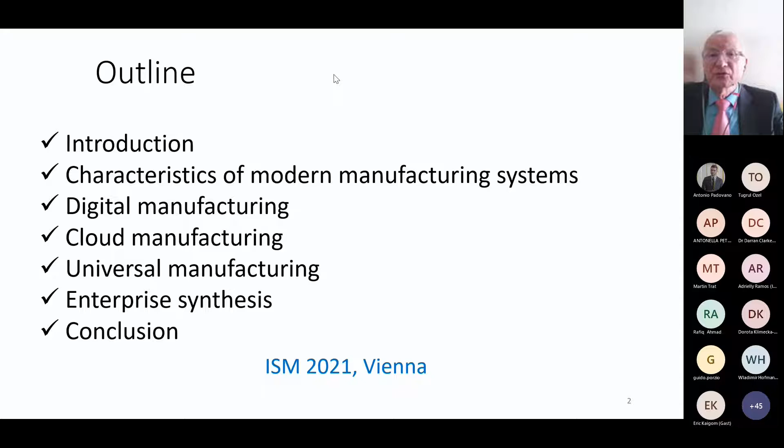I'll characterize modern manufacturing systems and talk about different types of systems, including digital and cloud manufacturing, and eventually we'll get to universal manufacturing. Okay, and basically we'll also emphasize some high-level modeling of manufacturing systems.

So this is a summary of what I see in terms of developments in manufacturing. So if this is the manufacturing universe, in this manufacturing universe we'll have open manufacturing that I'll talk about. Within open manufacturing, there is a manufacturing configuration that we call universal manufacturing, and these types of systems will make one extreme of manufacturing. The other extreme is made of integrated manufacturing. I'll define those various types of systems in the presentation.

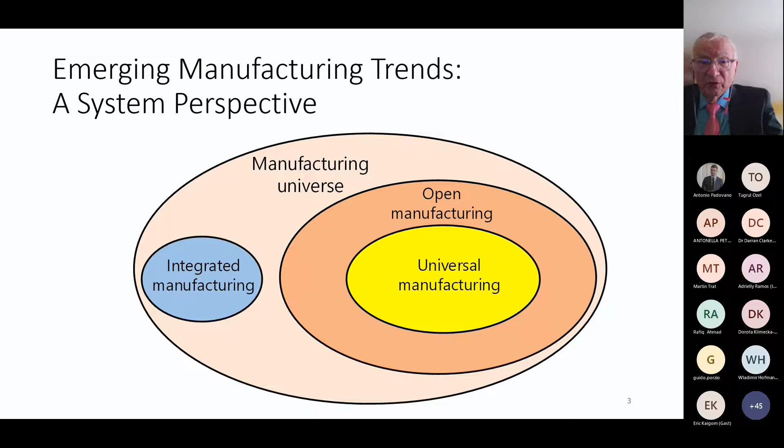But before we go there, let's go back to year 2017. In 2017, there was a World Manufacturing Forum that took place in Cernobbio, Italy, and this is a slide that I'm borrowing from this conference. Basically, what you see here is that most of us in science and engineering like to focus on disruptive progress. We tend to assume there will be some kind of linear progression of developments in various domains, including manufacturing.

But what could happen though? Before the pandemic, it has been observed that sometimes adverse events may prevail, such as environmental or pandemic events. So the development doesn't progress as we have anticipated. There could also be something severe happening with artificial intelligence that prevails in many applications, and in the end, even politics may impact developments in manufacturing.

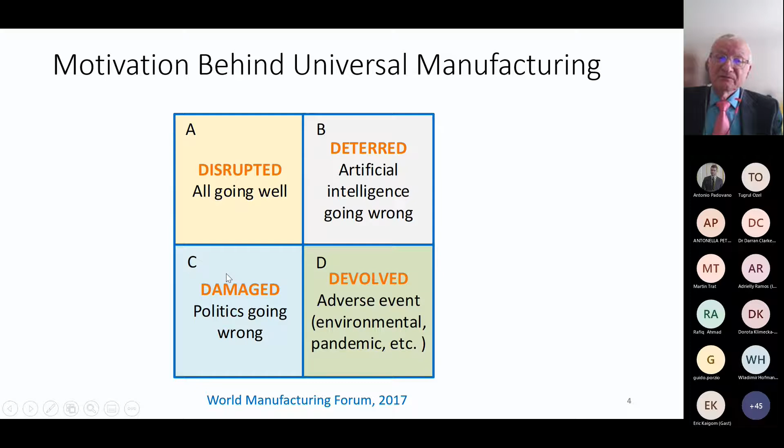So this is actually a very important graphic that we ought to remember, that focusing on just a narrow problem in this quadrant doesn't suffice. And that's really the motivation for the concept that I call universal manufacturing, that we ought to also consider this environment around the usual domain of our activities.

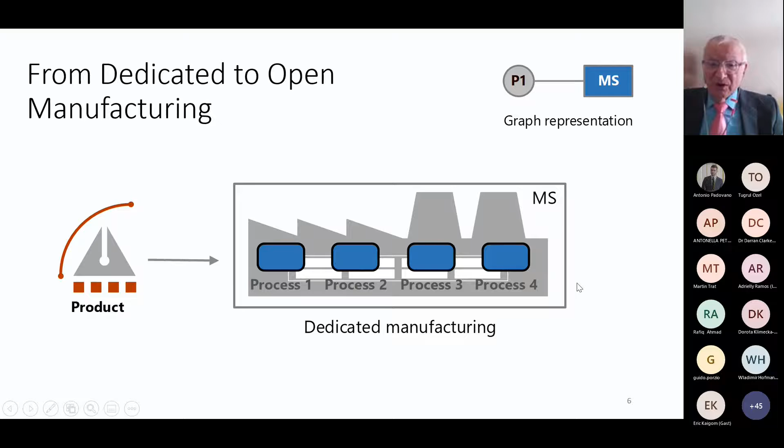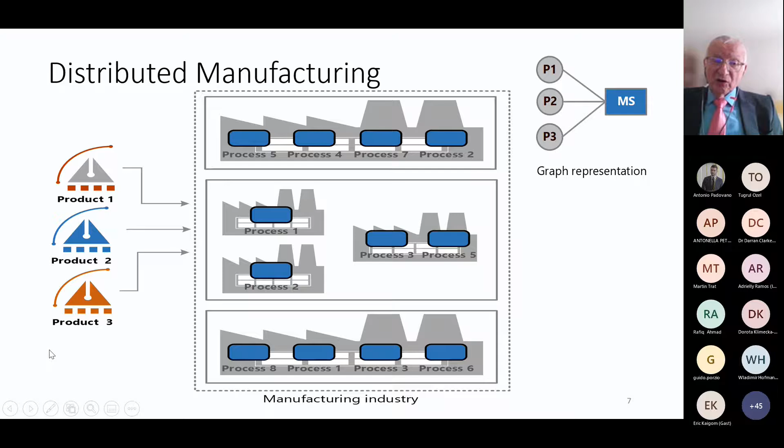So the natural progression from this dedicated manufacturing was basically to distributed manufacturing. In distributed manufacturing, first of all, we have geographical distribution, we have functional distribution, and this distributed system accommodates many different products. So the relationship, rather than one-to-one as in the previous system, is many-to-one. So this is still a distributed system, but it accommodates many different products.

Now let's summarize. Open manufacturing makes this extreme of the emerging manufacturing envelope. Integrated manufacturing makes the left extreme. So as you see, open manufacturing is highly flexible, while integrated manufacturing is specific. It also implies innovation of a different kind than the one that takes place in open manufacturing.

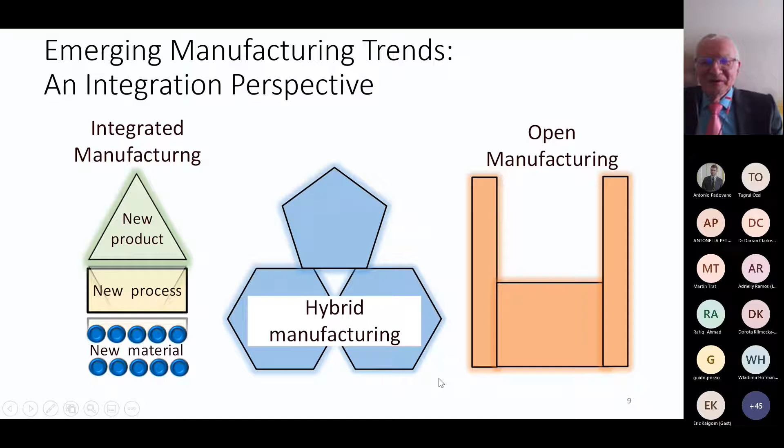So in other words, those are two extrema, and that's the reason I call it extreme manufacturing. In between, there will be hybrid models of manufacturing as we see today. Over time, I think integrated manufacturing is going to expand, and open manufacturing is also going to expand, so the middle portion is going to shrink. I think the future will show how fast we'll get to this concept.

Now, at the core of this is actually manufacturing as a service, or service models. It's sometimes difficult to imagine that manufacturing can become a service, and I'm talking about manufacturing processes here. But actually this is happening.

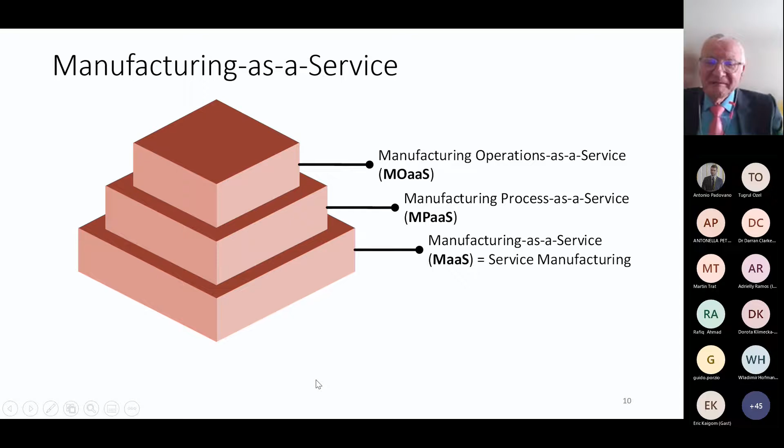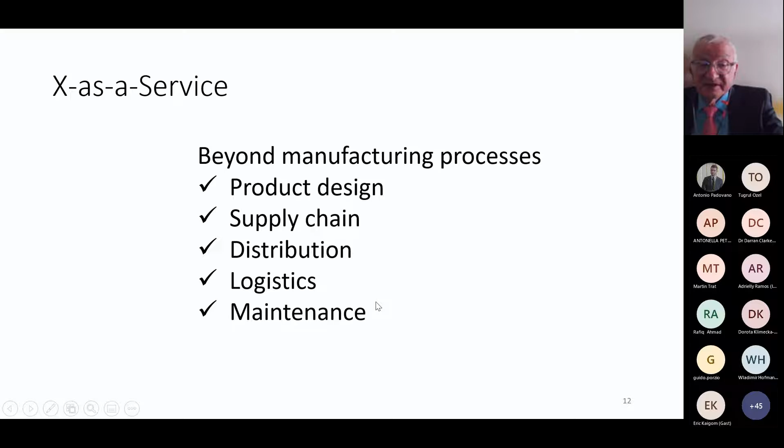And how this is going to work, let's look at the relationship between product development and manufacturing today. So today, design and manufacturing are tightly integrated. But what are we doing when we are designing a product? We know that a product cannot be designed in abstract of manufacturing. It has to be designed for manufacturability.

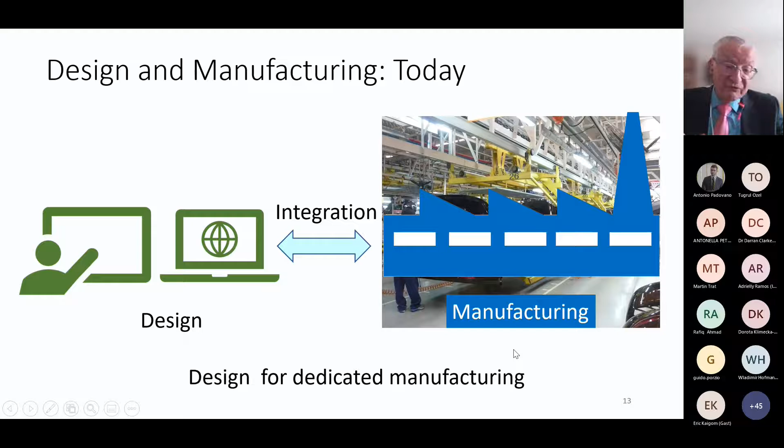By this, we imply that we design products for dedicated manufacturing, because what we have in mind today is specific manufacturing processes. But we are moving away from it, and this is what's going to happen. So when we end up with universal manufacturing, we'll actually design for systems that we don't see, we don't own, they just exist. And once we complete the design, we'll have many manufacturing options, because those systems will exist in the cloud.

And what we are going to do is select specific manufacturing processes, specific manufacturing solutions, to manufacture the product that we have developed. In fact, it's conceivable, and it's going to happen, that a company or individual may design a product, and to design it, that person or entity doesn't have to own any design facilities. This again could become a service.

So they could use design service as well as manufacturing service, and to do this we need modeling. Some of it could be accomplished with process models. As you can imagine, every manufacturing facility will gain presence in the cloud. But to be present in the cloud, you don't just want to show your graphics - you need to show some models, because it's not enough to take a photo of your company or your machine and post it in the cloud. This would not get us far. To make it work, we need to post models in the cloud.

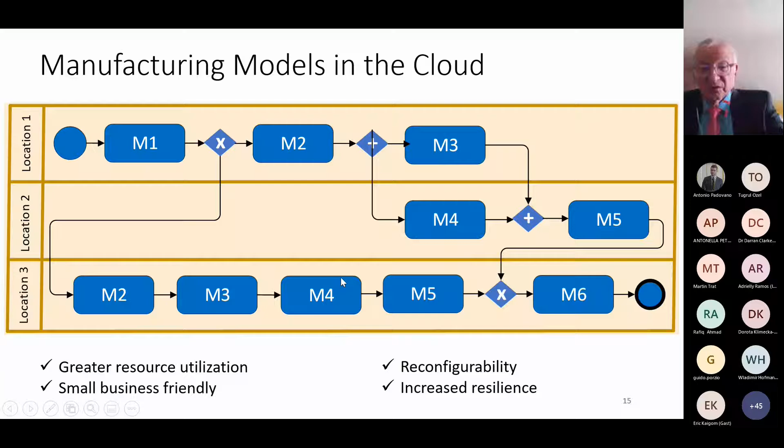One way is to actually use process models, so we don't have to start from scratch, because we have over 70 different process modeling methodologies. We can use languages such as Systems Modeling Language, which more or less resembles the language we use for coding. Or we can use more graphics-oriented modeling methodologies, such as Business Process Model and Notation. Maybe this isn't the most suitable methodology, but one reason I picked it is because it has an ISO standard, so in essence this methodology serves as a universal language.

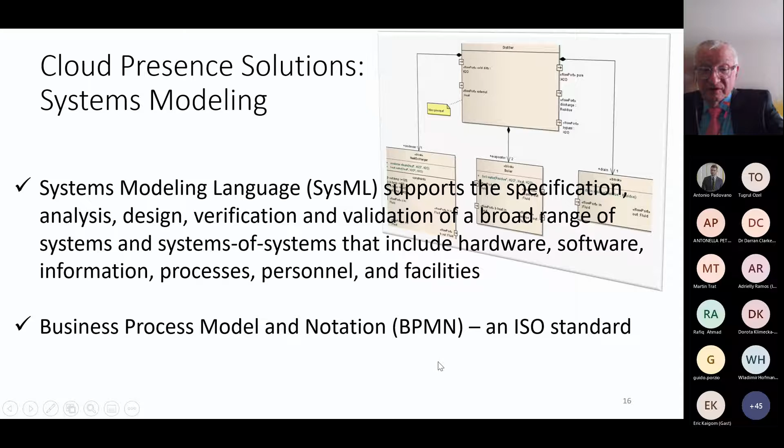If I have a universal language, then I can describe any manufacturing facility in this universal language, post it in the cloud, and then basically digital processing, information processing, will be feasible, because I'll be able to search this database for models that imply specific manufacturing capabilities. Now let's take a simple example to explain this concept.

Assume that I'm a manufacturer of this bottle. This bottle has only 3 components: the actual bottle container, a cap, and a tube. So my manufacturing facility that I use today looks like this. I use a tube injection machine, a cap injection molding machine, and a container/bottle injection molding machine.

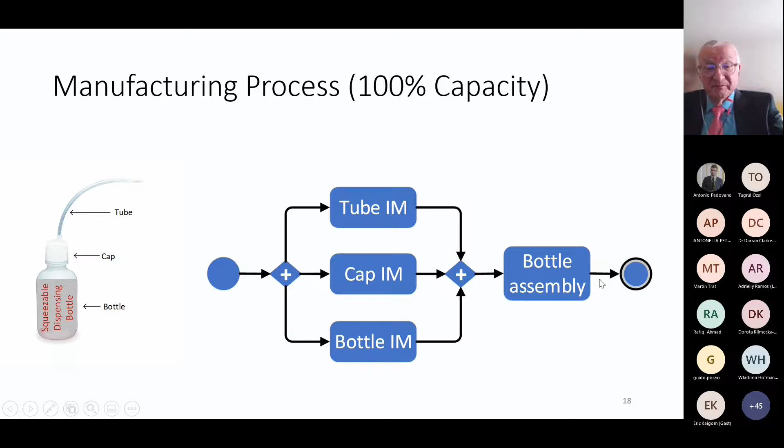So I have produced 3 components through injection molding, and I am now assembling this bottle, and that's my final product. Now assume that someone wants 3 times as many bottles, or maybe 3,000 times more bottles than I'm manufacturing right now. So imagine, how would you increase production capacity according to today's capacity expansion model?

Well, you would have to look for investment, build up this production facility. There will be hesitation, because it would be difficult to convince a chief financial officer to sign off on this investment when perhaps the order isn't secure - there's maybe some uncertainty. So in today's model, we've seen that companies have difficulty scaling up rapidly. But this is going to happen in the future quite often.

So in order to meet this perhaps very variable demand, we need to move to this model of universal manufacturing, where we have facilities represented in the cloud, and just a simple search will lead us to the selection of various alternatives. And obviously, there's always capacity somewhere available that can be used to meet this demand. So this concept will change the nature of manufacturing as we see today, because you'll have large manufacturers and small manufacturers present in the cloud.

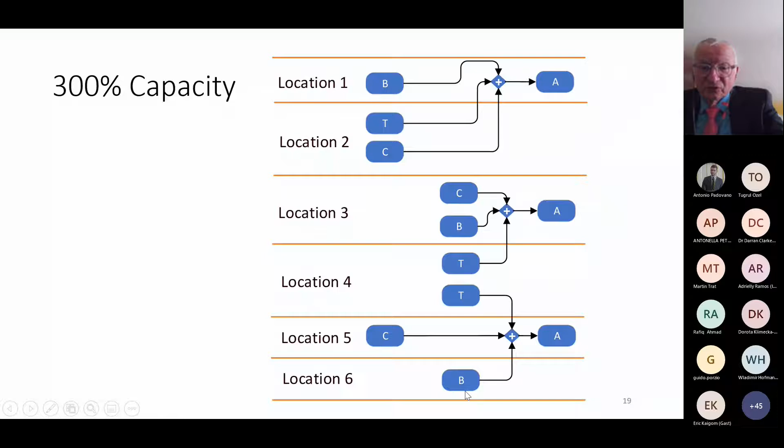So now the benefit to small manufacturers will be that they'll have more opportunity to be selected, so the competition will be more fair. In essence, this will contribute to democratization. So this will convert manufacturing, as we know it, to really more democratic manufacturing, because right now larger manufacturers may take advantage of smaller manufacturers. Smaller manufacturers don't have resources, don't have ways of selling themselves. And this concept of universal manufacturing will allow them to be present and to engage in meaningful contracts.

So how can this be done? Actually, this can be done in two ways. What I need is the products that I'd like to manufacture in projected quantities. So what I will need is a standard interface, and this is something we have to agree on, just as we have to agree on this universal language of communication - BPMN methodology is an example. We also would have to agree on some kind of standard interface that we could use to enable communication between products and manufacturing facilities that exist in the cloud.

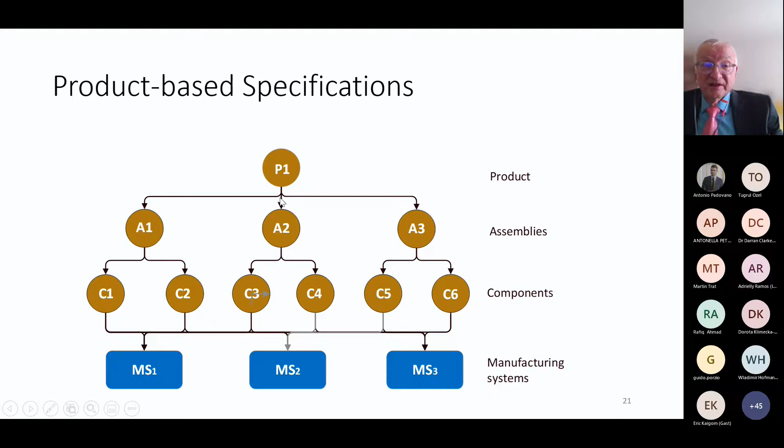So this would be one way, sort of the product way. I could also - as you see here - a product includes some assemblies and components, and eventually those lead us to specific machines or manufacturing capabilities, basically services. Those are, in general, at the bottom level here various services that would be requested by this model.

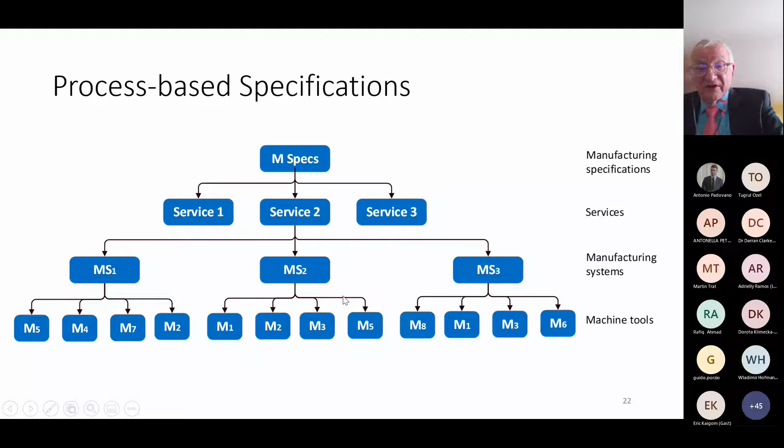The second option is to go directly through process specifications, through manufacturing specifications. This approach applies to established products. The first approach is when someone develops a new product and goes through the cloud to find the most suitable manufacturing facilities. The second approach goes through manufacturing specifications, because we may have an existing product with a need to produce in much larger quantities, or some redesign has taken place. Since we have information about manufacturing processes, this is a quicker path to finding the configurations.

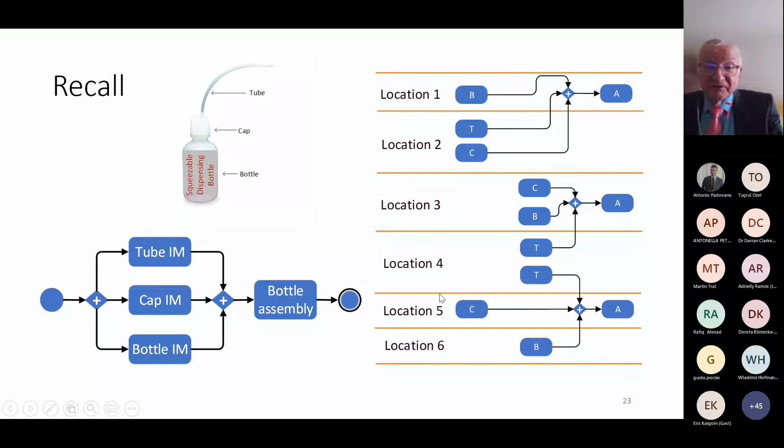So in essence, this is what's going to happen. This was my manufacturing system, and since demand increased 3 times, I went to the universal cloud and was able to find those 3 configurations out of many that were present, and I'll be using those for manufacturing this product, maybe for only a month or a short period of time. This was an opportunity I was able to take advantage of because of this manufacturing approach.

Now, if I wanted to formalize this process a little, to take it closer to modeling and implementation, this calls for having some kind of table, some matrix, when you specify manufacturing capabilities. And this is not only machines, but tools and all types of services as well as software. So this will be a very large scale matrix, and those will be specific manufacturing systems present in the cloud.

So what I need is a relationship between the manufacturing systems owned by different companies and machine tools. In addition, I need another piece of information, which has to do with a similarity matrix. This similarity matrix is between various machine tools and resources, because there could be identical machine tools, but there could also be machine tools and other resources with similar capabilities. This could be expressed in a similarity matrix. So in summary, I need a matrix showing the relationship between machine tools, or manufacturing resources in general, and manufacturing systems, and a second matrix showing the relationship between manufacturing resources, in particular machine tools. Those are the two major pieces of information.

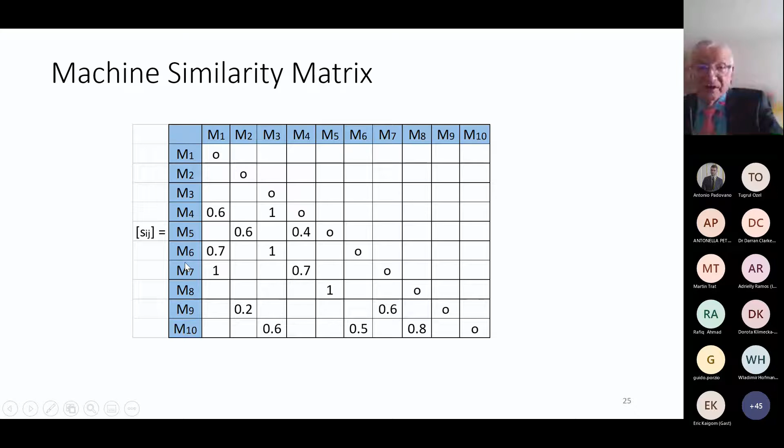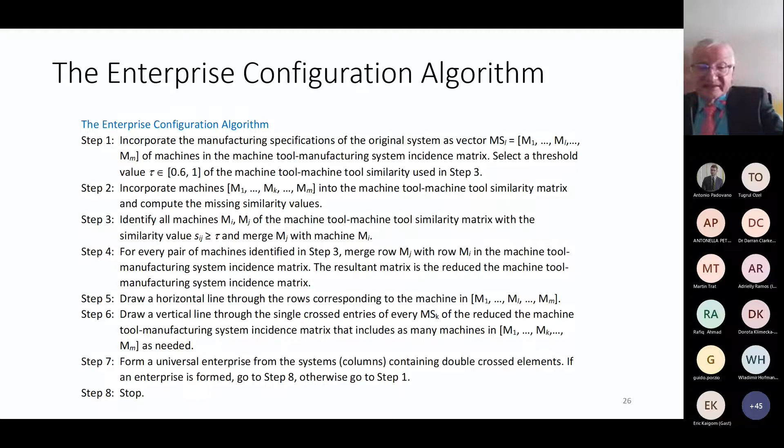Now, this algorithm, which I call the enterprise configuration algorithm, would do all the processing and select component models that would make up my future enterprise. This is not yet my final configuration of a system able to manufacture to meet this 300% increase in demand—those are just component systems.

So in addition to this previous algorithm, I need to apply another one to synthesize those component models, because there may be many—not just for machines as illustrated in this example, but for all types of resources and services. There may be hundreds of different models, so we need algorithms. I call this the synthesis algorithm. The previous one was the configuration algorithm, which determines the component models. This synthesis algorithm will take the component models and assemble them into final enterprise models.

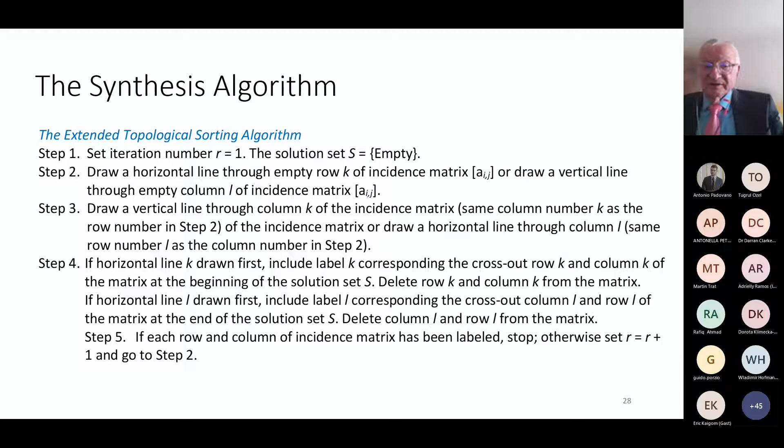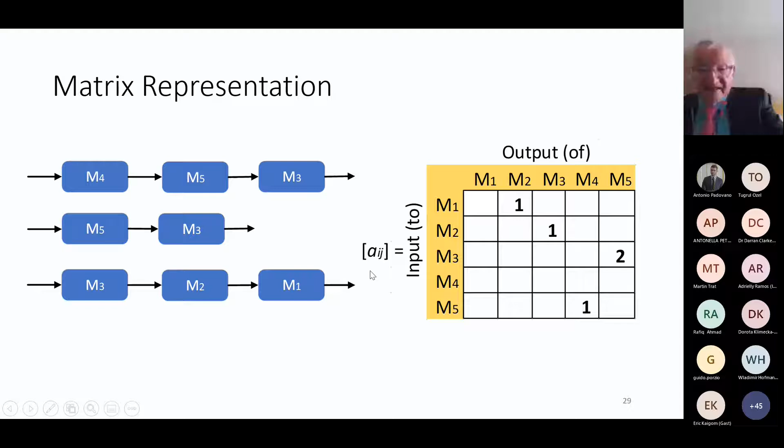So how can this be done? If I consider this example of the partial models that I have here, they can be represented again in another matrix—like a machine or resource matrix—showing the relationship between those blocks. In essence, those are precedence relationships recorded here, like between machine 5 and 3, which appears twice since that relationship occurs twice. This matrix represents this graph, and the algorithm transforms this matrix, and in the end I get this final model. So those partial models are synthesized into one model. This is a brief illustration of how this can be accomplished.

So as you can see, what we are showing here is that in order to move manufacturing forward, we do not have to reinvent everything. We have valid methodologies, including engineering modeling methodologies—model-based systems engineering in general—that can be used to represent systems. The greatest benefit of this methodology is that some of these methodologies have become standards.

So we could use this universal standard across the globe. Now manufacturing obviously is moving forward, so it's going to become more open on one end, then also integrated will be the other extreme. And this is important, because those two different models will call also for different types of innovation models.

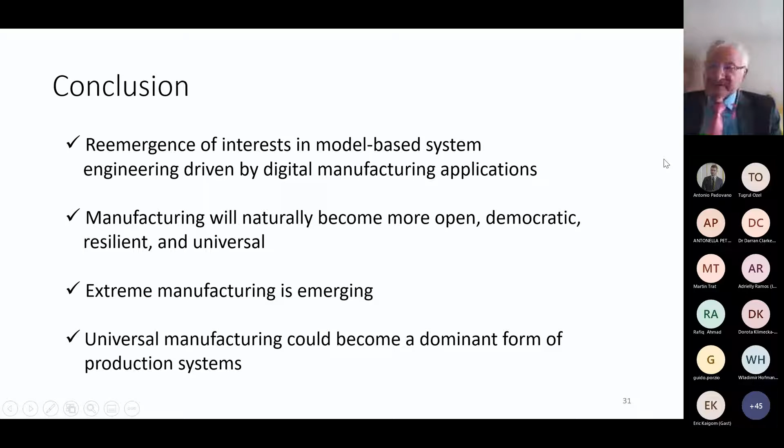Well, thank you. It was great talking to all of you, and I'm happy to answer any questions that you might have.

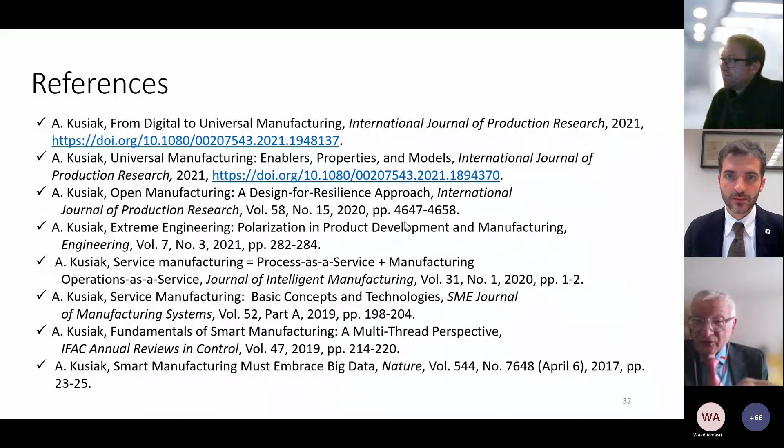I thought, well, thank you, I thought about it, right? Definitely standardization, yes, because we need to basically speed up communication, so we need to devise a different language. I view all standards almost as a language, and this is happening. If you look at the manufacturing floor, we have this MTConnect standard, which has become an ISO standard. So in terms of data exchange, data modeling has emerged. Then also, there are changes maybe in design philosophy.

Again, we are not going to cover 100% of products, but what you pointed out, maybe we use some simplified design, more standardization. Yes, it may happen, because sustainability may get us there. If someone comes with new organic material, or we run out of some materials, or this material becomes socially acceptable that everyone runs out of it, we may follow some standards because this could be new material we didn't have much experience with. So on the safety side, let's be more conservative and design products in a specific way. I think this changing environment will push manufacturing into one direction.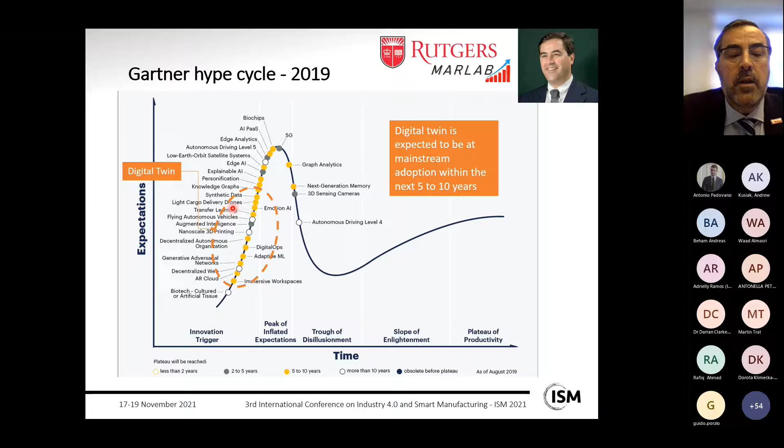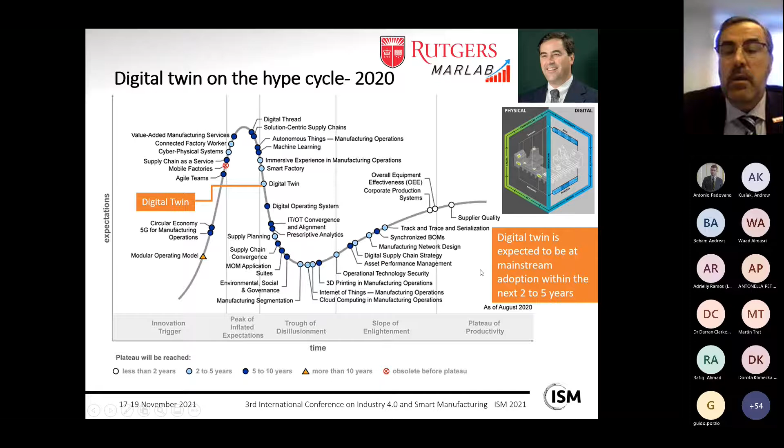In 2020, other concepts came out at the innovation trigger stage: physics-informed AI, AI-driven innovation, digital humans. In the 2020 survey, digital twin had already passed the peak of inflated expectation cycle, and it's trailed by smart factory, machine learning, autonomous things, and digital thread. Some of the things we're going to talk about today are also in this hype cycle stage. Now it's expected that within the next 2 to 5 years, digital twin will be in mainstream adoption.

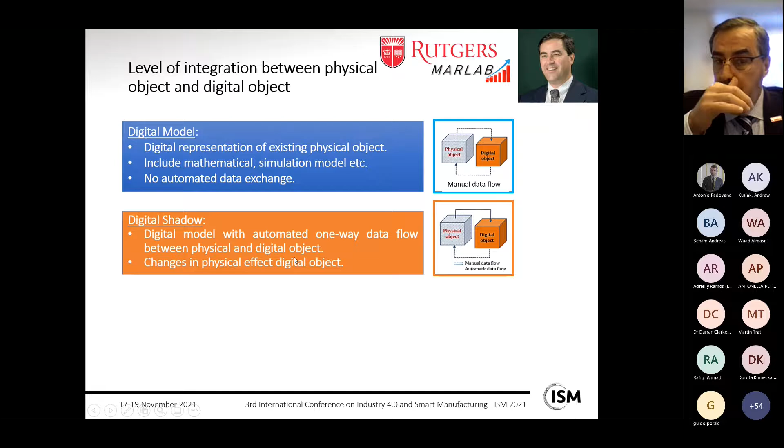Let's review a few definitions based on the level of integration between a physical object and a digital object. If the connection between the two is just manual data flow - a digital representation of an existing physical object - most engineering simulations fall into that group; they're just digital models with no automated data exchange. In case there is feedback or one-way data flow from the physical object to the digital object - for example, some conditions change in the physical object that can be presented in the digital model - this becomes a digital shadow, where changes in the physical system affect the digital object.

But the digital twin definition requires interaction in both ways between the physical object and the digital object, with an automated data flow. That means continuously both will feed each other with a rich set of data and information, with the hope that the physical system will be improved and the digital system, digital model, digital twin, will keep updating itself to that end.

Other definitions offered for digital twin prototype: the virtual description of a prototype of a product containing all the information required to create a physical twin. Digital twin instance is defined as a specific instance of a physical product that remains linked to an individual product throughout that product's life.

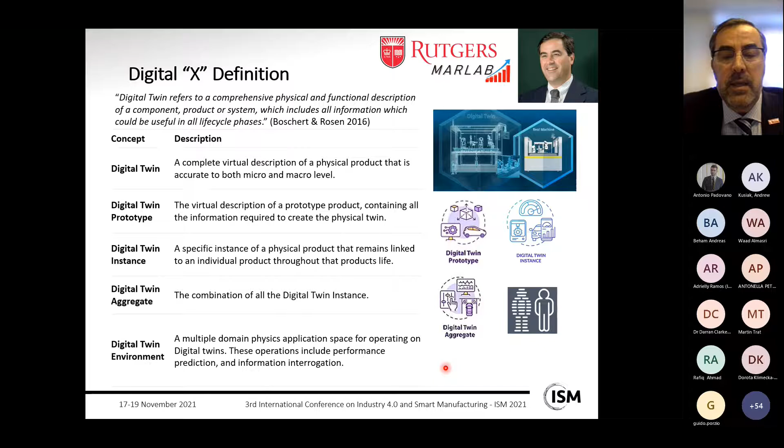The combination of digital twin instances forms the digital twin aggregate, and there are various kinds of icons and things offered in industries and in think tanks. The digital twin environment is eventually a multiple domain physics application space for operating on digital twins.

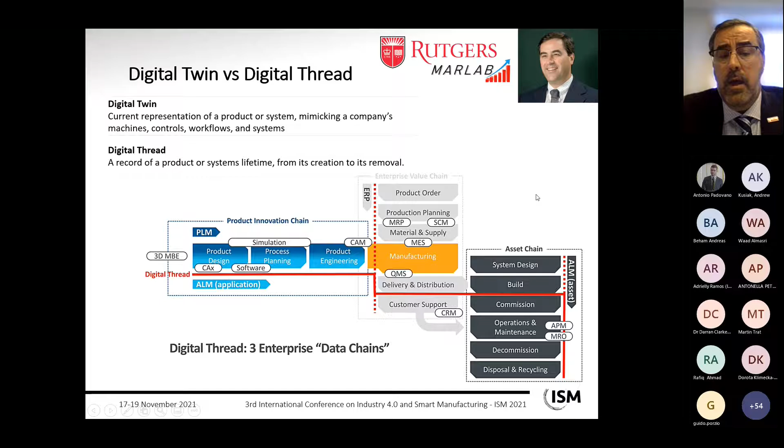As you remember seeing in the hype cycle, digital thread is also coming up. What is the difference between digital twin and digital thread? Digital twin is simply a representation of a product or a system, mimicking that company's machines, controls, workflows, and systems. Digital thread, however, is a record of a product or system's lifetime from its creation to its removal, so more inclusive, including three stages: product innovation chain, enterprise value chain, and asset chain, going through all those data chains to form the digital thread. This is up and coming.

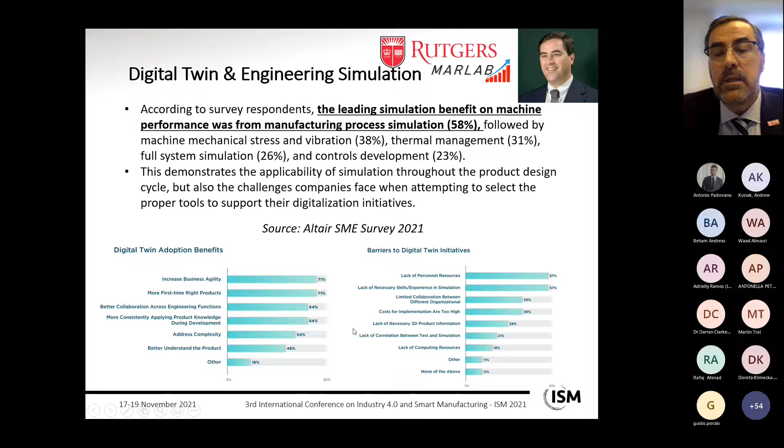So the future workforce should focus on improving in industries, fulfilling these roles that present barriers to digital twin initiatives. And if we were to look at the engineering design and simulation relations from a historical point of view...

We can see that engineers discovered computers, and computer-driven design took place between 1960 and 1984. Between 1985 and 1999, engineers started to use simulations to analyze their systems, and simulation analysis found a lot of applications—most basic being stress and thermal analysis.

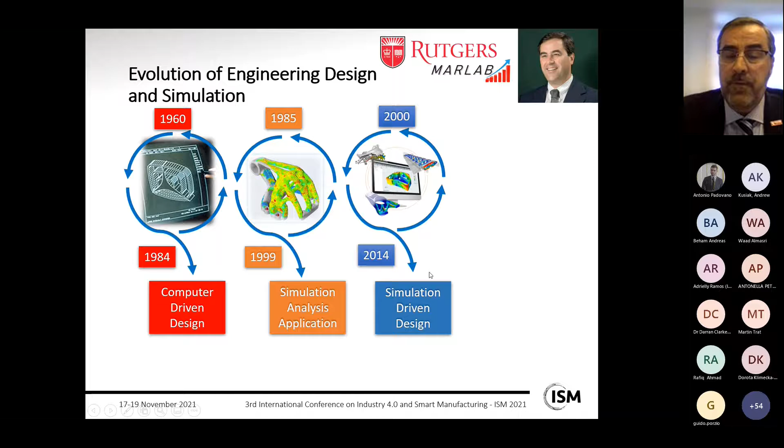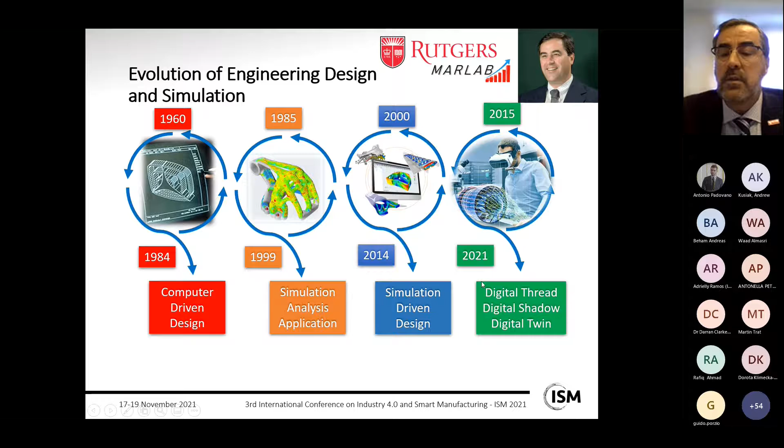Between 2000 and 2014, simulations were mostly used to derive the design; simulation-driven design became a common practice in this time frame. In the next cycle, between 2015 and 2021, it became more of a reality that digital tools, digital models coming from engineering simulation, found their place in digital shadow, digital twin, and as I indicated, as part of the digital thread to cover the entire life cycle of a product or system.

Let's now look at, within this context, our presentation title today, which is machining and additive manufacturing processes, a large group of processes among the manufacturing processes that take advantage of the digital twin in this context.

Digital twin for machining systems should include digital twin for the machine tool, digital twin for the cutting tool, and digital twin for the workpiece. They include static, dynamic, and thermal behavior of the machine tool, cutting tool, the process, the chip removal process, as well as digital twin necessity for the workpiece.

How can workpiece information be digitized in order to feed into this system? The ultimate goal is to produce smart and zero defect manufacturing. There are various kinds of solutions, or frameworks, that use AI-based technologies, for example AI-based detection and predictions.

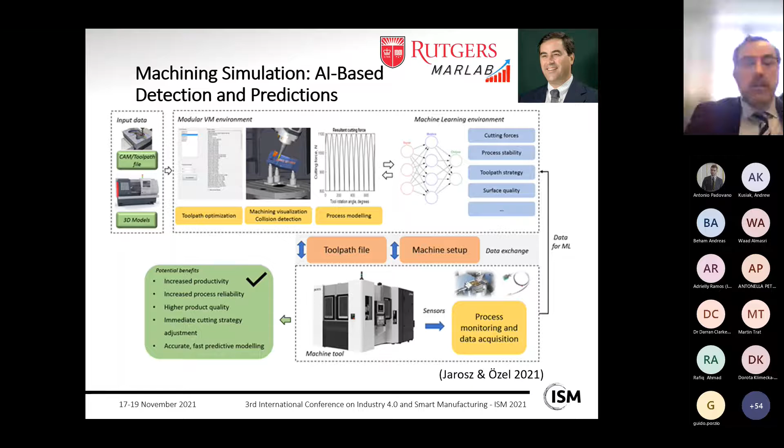Input data is collected, and then in the virtual environment, machining is performed. This results in training of deep learning and machine learning algorithms to support the actual physical system. The physical system provides continuous data flow through sensor fusion to fulfill this interaction between the two systems. Potential benefits include increased productivity, overall system optimization, increased process reliability, increased product quality, and so on.

Specifically, how this can be achieved at a lower level—I would like to give you one example from our past studies where we use machine learning-based surface predictions in manufacturing processes, particularly the machining deformation process.

Titanium machining: the physical object is the titanium workpiece material, and the digital model is the chip removal model, essentially the machining model, where a finite element simulation is used, providing thermal and stress predictions as well as other results. It is, in a sense, a digital shadow of the machining process.

As a result, it provides input to the physical object, which is the machined workpiece material, which provides feedback about the grain sizes and the volume fractions after machining—how the microstructure is affected by the machining process. To capture all of this through some surrogate aggregate models, machine learning random forest regression is offered.

This connects the relationship between the cutting tool and cutting conditions and the grain sizes, the microstructure, and the microstructure hardness.

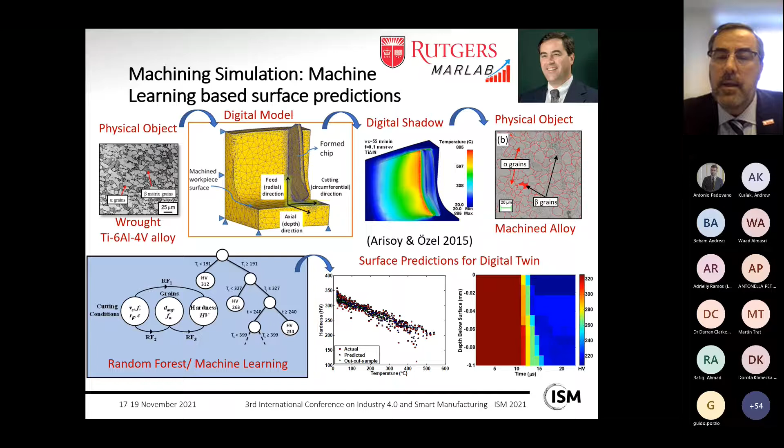To realize this, hardness versus temperature information is used, and then surface predictions for developing a digital twin for this machining process are offered as a digital result, predicting the depth below the surface hardness distribution with respect to time. So during the cutting process, one can see changes in the hardness in the digital model and then adjust properties or cutting conditions to optimize this.

Another perspective in the framework is AI-based cutting force predictions. In this case, classical methods—mechanistic force models—are used in combination with experimental measurements. Typically, they need each other to survive.

On top of that, a machine learning, deep learning model is offered to use this data obtained from both the mechanistic and experimental models, improving the robustness and reliability of the force predictions—an AI-supported decision-making tool. Another example is AI-based chatter detection.

In this case, a lot of dynamic models for the machine tool and the machining process are offered, but by adding an AI-based layer to it, we get better predictive capabilities. Surfaces obtained with different kinds of force signals for stable cutting, transitional cutting, and unstable cutting are converted into different kinds of surface quality.

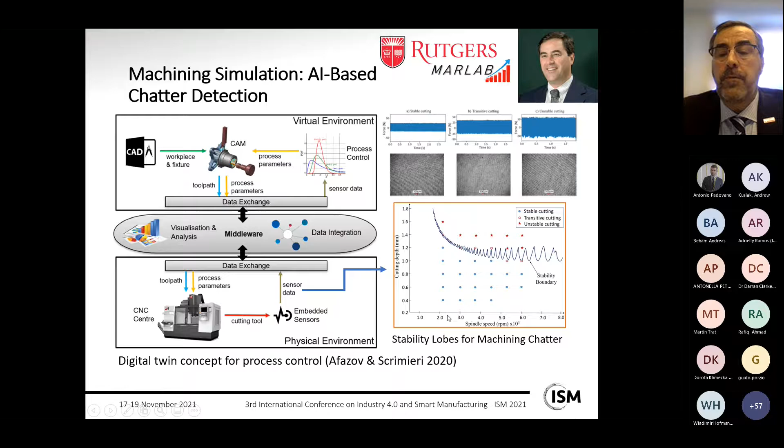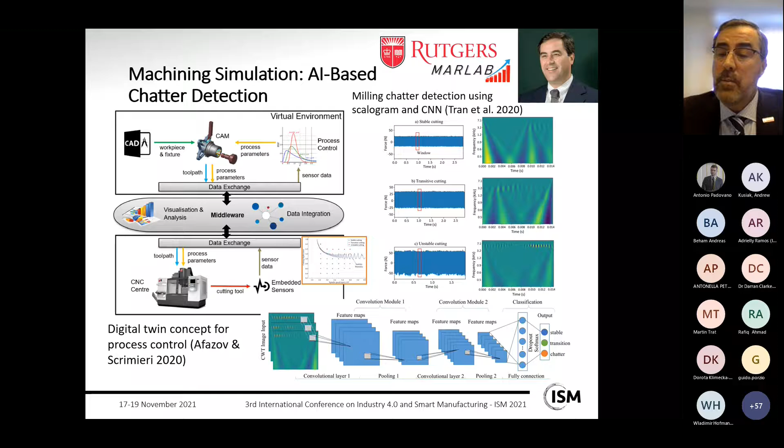We know there is a stability lobe for machining chatter, and this information is used—cutting force signals are converted into so-called scalograms, where images are used to train convolutional neural networks in different convolution layers, and then a fully connected layer is added to achieve classification so that surfaces are recognized as stable, transition, or chatter-produced. The machine tool can then become more intelligent to avoid instability in dynamically changing cutting conditions, achieving stable cutting and assured part quality.

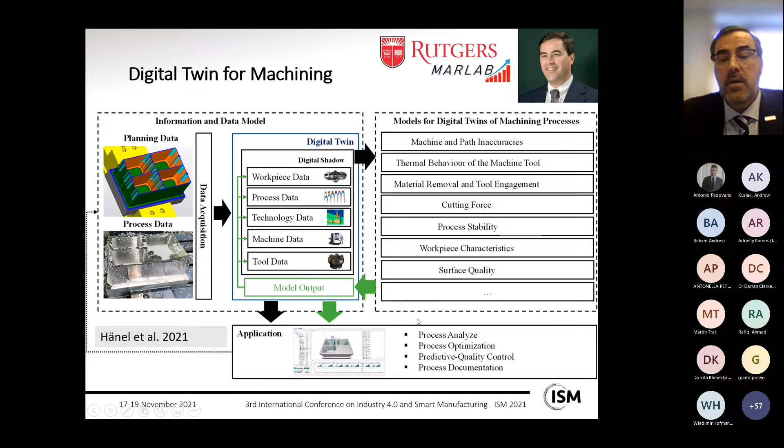Digital twin for machining is also holistically reviewed. The current state is that the digital twin will require a lot of digital shadows for workpiece data, process data, and so on. Models for the digital twins will be developed as piecewise models, and when integrated into a modeling framework, they complete the whole scheme of obtaining a digital twin for the entire machining system. The rewards are essentially application, analyzing process, optimizing, predictive quality control, and documentation.

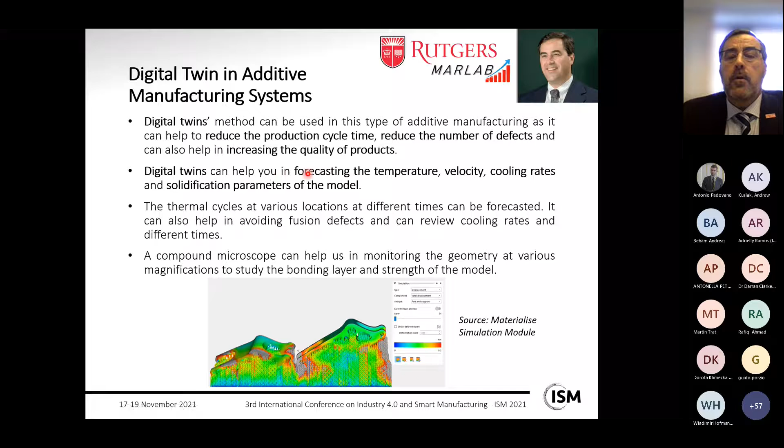For additive manufacturing systems, digital twins are also offered and currently under development. The benefits include reducing production cycle time, reducing number of defects, and increasing the quality of products. Software companies are offering various kinds of simulation tools that address this, typically geometry and physics-based simulation models, able to forecast temperature, velocity, cooling rates, solidification rates, and so on.

The AM simulation digital concept will provide a link between the physical process, the manufacturing process, and its digital twin, which requires sensory data and generates continuously improving digital models used for decision making. Through measured process data, the physical process provides input to the digital twin, and in exchange, the digital twin provides model decisions to improve the physical process.

But these are very difficult tasks to achieve. Let me give you one example of the digital twin concept, to obtain various kinds of predictive outputs from an additive manufacturing process. The particular process we're looking at is laser powder bed fusion, and physics-based simulation models can be offered at the microscale, melt-pool and mesoscale layer-wise, and part scale, for example 3D porosity.

The physical part manufacturing needs to be improved by providing simulation, validation, and data flow continuously. In return, the process is monitored with in-situ and ex-situ measurements, providing a data flow feedback for improvement of those models. Various input-output relations can be obtained once those physics-based simulation models are established, and through surrogate models, which are less expensive than the actual simulation models.

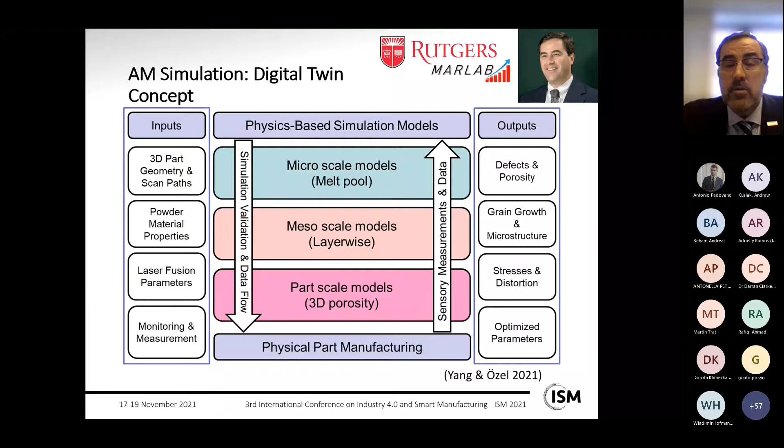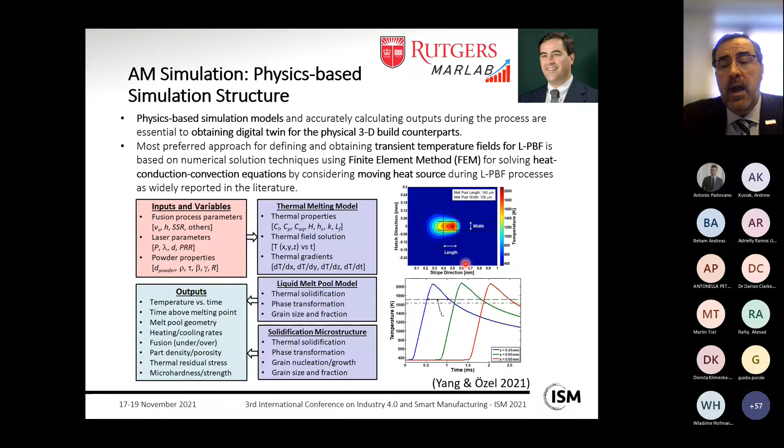Let's review physics-based simulation models, what they currently are. For example, those could be very basic two-dimensional thermal models where melt-pool size and shape can be predicted, as well as the time and temperature history of the process. If you look at the literature, we can see various kinds of solutions offered in that regard.

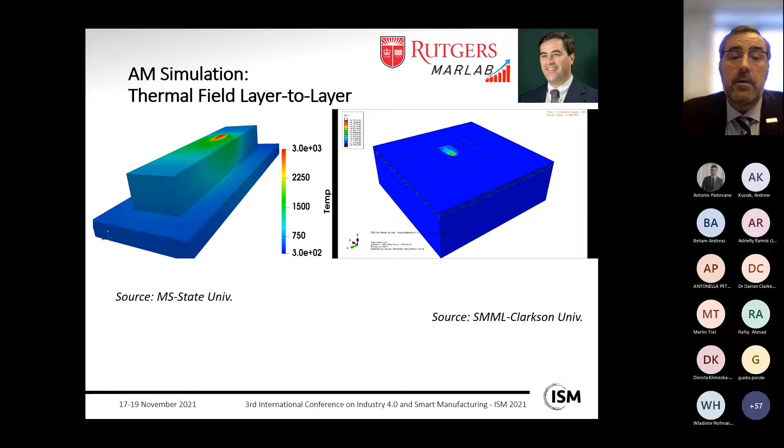Here are some simulations for thermal fields, and we can see as the 3D part is built, the temperature history of the build. This is offered for directed energy deposition, thermal field, layer to layer, as well as other additive manufacturing processes, mostly for metal additive manufacturing.

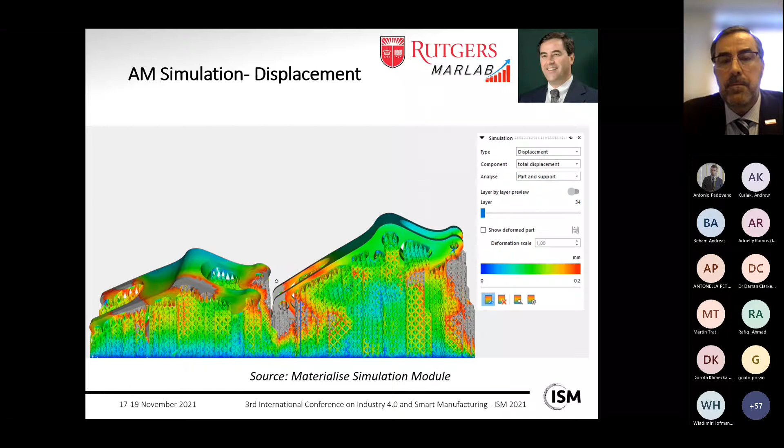For the design, one of the important things is to know the displacement of the part that will be built, because the building process, the manufacturing process, will incur a lot of inaccuracies, including displacements. These tools are available from various companies, for example Materialise and Simufact Additive, where you can see the total displacement of the parts as well as the support. After the support is removed, residual stresses, thermal stresses, will result in total displacement as an end result.

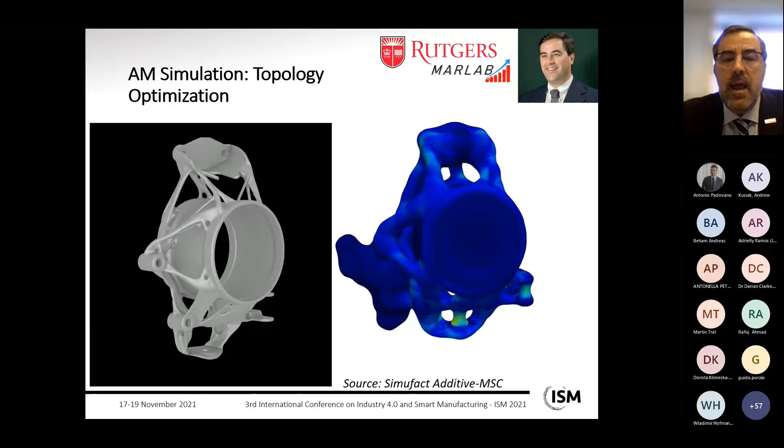This is highly useful and beneficial for optimizing the geometry in connection with topology optimization. Here we can see two examples offered for topology optimization, but these are not connected to the particular manufacturing process simulations. These are in the design stage.

For the displacement, we can also see that it is highly important, especially for thin wall structures, where they will be very sensitive to those changes.

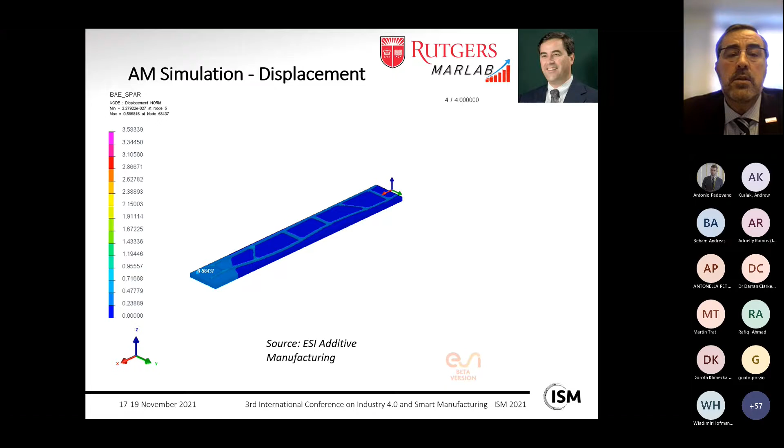At a micro scale, various kinds of simulation models are offered. These are powder bed fusion or powder fusion simulations, using various kinds of physical principles, for example computational fluid dynamics or powder particle dynamics, to be able to see the multi-scale physical events taking place during this process.

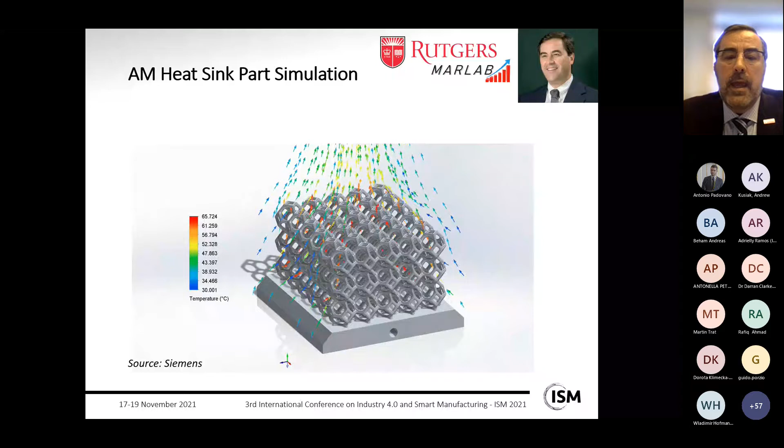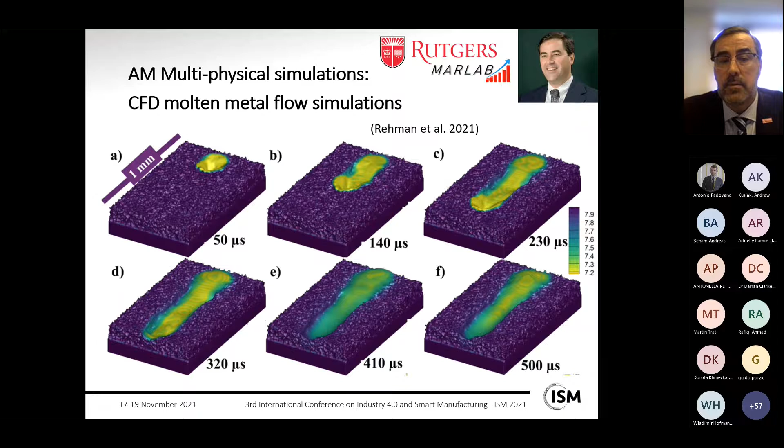For example, this is a computational fluid dynamics model, a molten metal flow simulation. It's nicely showing the detail, but it's irrelevant or not connected to thermal simulations, for example. It shows the detailed events taking place, the heat conduction versus the heat convection. Heat convection is responsible for the phase changes from liquid to the gas stage. Heat conduction is from solid to liquid changes.

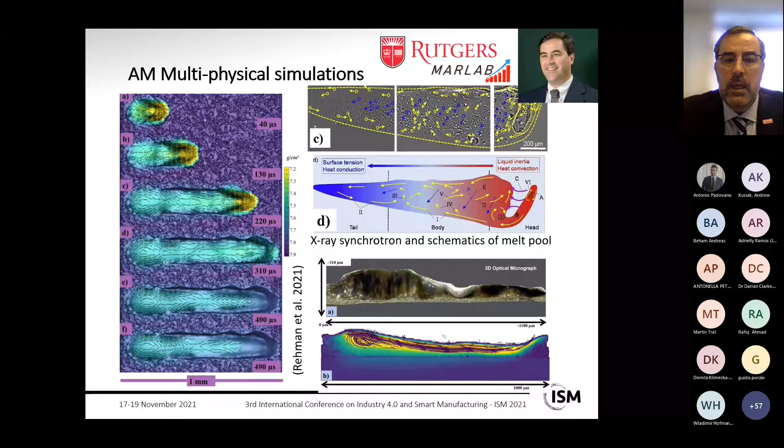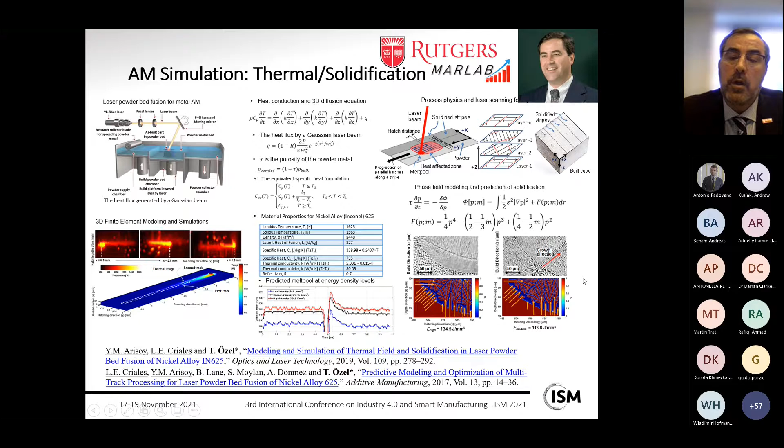We also conducted various kinds of thermal and solidification simulations based on the heat conduction and heat convection equations' numerical solutions, which are validated with thermal measurements, and then thermal fields are used in the phase field to predict the solidification microstructure. These are two simulations connected to each other: thermal field provides a solution for the meltpool boundaries, and that is inputted into the phase field to show the nucleation process and how the meltpool material crystallizes and forms an end result solidification microstructure. Can this be controlled by the system input to the machine tool, and also knowing the material property changes?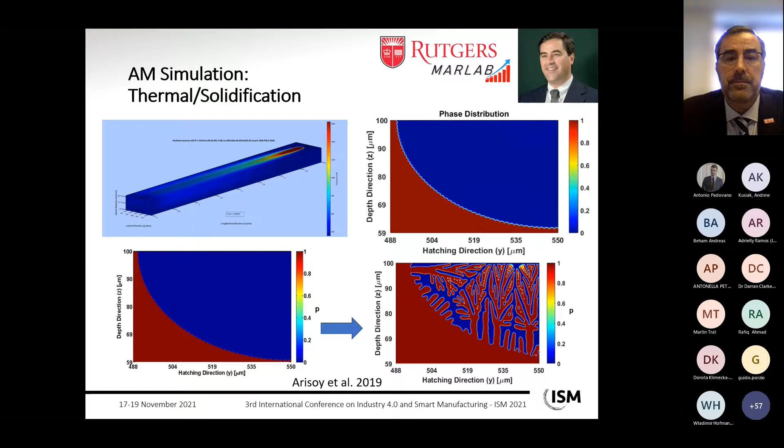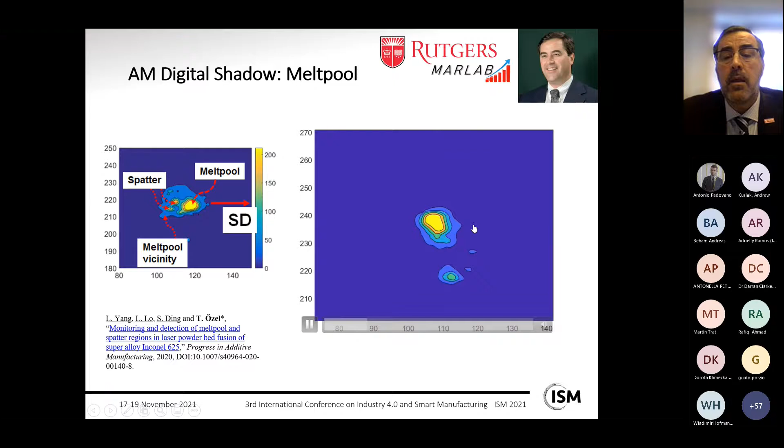Another example is how to develop a digital shadow by using in-situ monitoring and measurement of the meltpool. These are images obtained with a high frame rate camera and thermal camera, and then they're converted using machine learning to a digital shadow of the meltpool. Now this can be analyzed in a virtual platform in order to see the effect of changing laser powder bed fusion parameters and its effect on the powder material spatter, meltpool formation, and dynamic meltpool behavior.

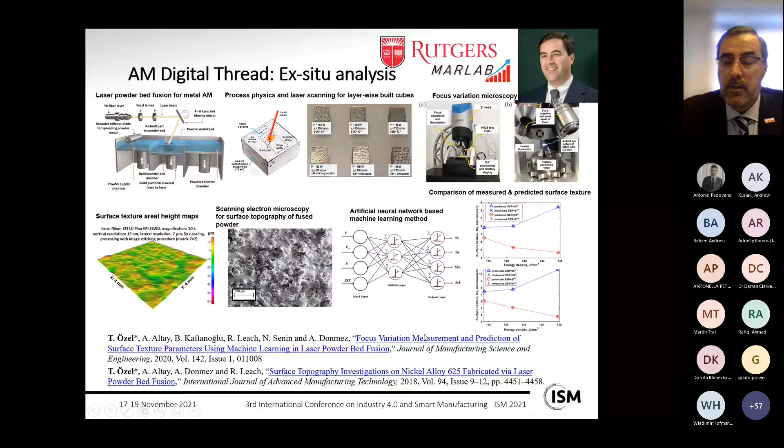Another example for the digital thread in how we can look at the product's life cycle is doing some ex-situ analysis on the additively fabricated metal parts and looking at their surface texture, using machine learning to capture the relations between the surface texture parameters and the laser powder bed fusion parameters. Then this information can be used for a life cycle model to improve the life cycle behavior of the additively fabricated parts.

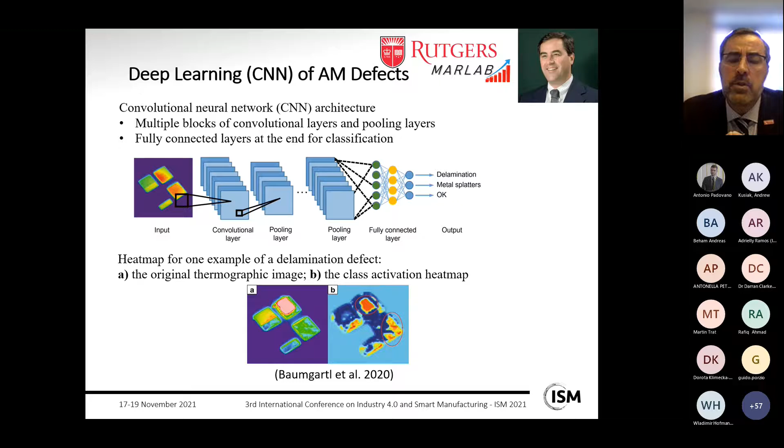For example, we're going to see some machine learning approaches in order to provide some piecewise models here to detect the defects in the process. Convolutional neural networks are used to identify the defects from the images taken in the layer-wise information, and again the same method is used to identify defects, this time from heat map images. These are readily available on most additive manufacturing machines, where they take various kinds of layer-wise images, whether optical images or thermal images.

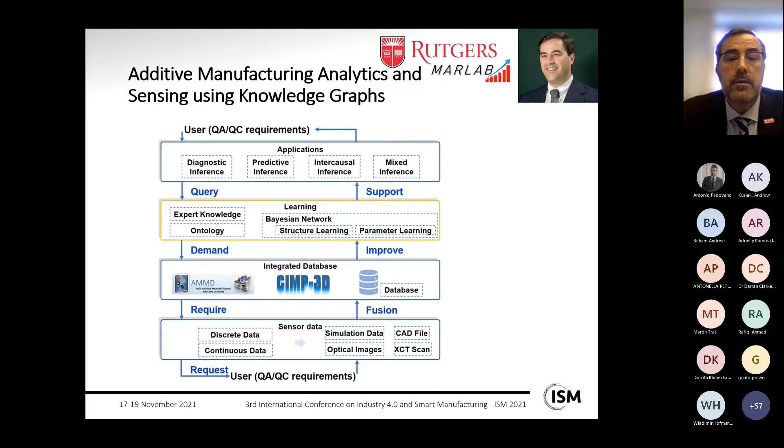Then there are other approaches offered, for example, how to provide quality assurance and quality control using some semantic approaches, as well as graph theory approaches to quickly calculate roughly the temperature distribution within the part without using lengthy thermomechanical process simulations. Eventually, the big idea is to control and optimize the manufacturing process, and then use the sensor data and machine learning in order to create decision agents to help improve this control process.

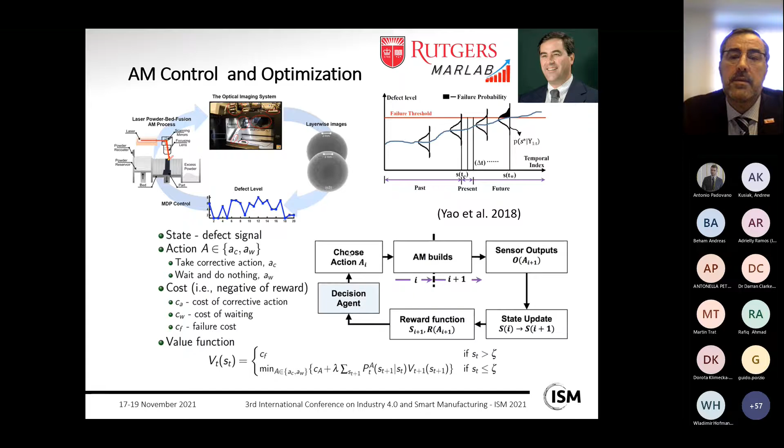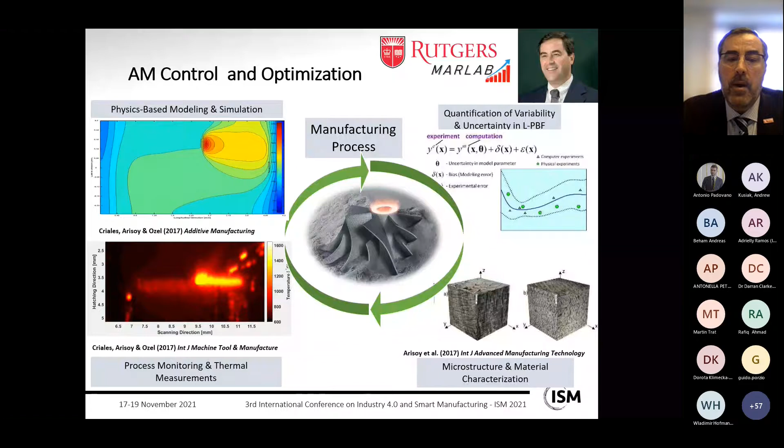And to this end, there is a strong need for surrogate models. Surrogate models are models that do not really need this multi-physics simulation results, and can be offered as a tool in order to provide a quick solution.

Surrogate models can actually be really useful in order to provide quick input-output behaviors, but then actually they can use the physics-based AM simulation models, and their behavior is captured by the surrogate model.

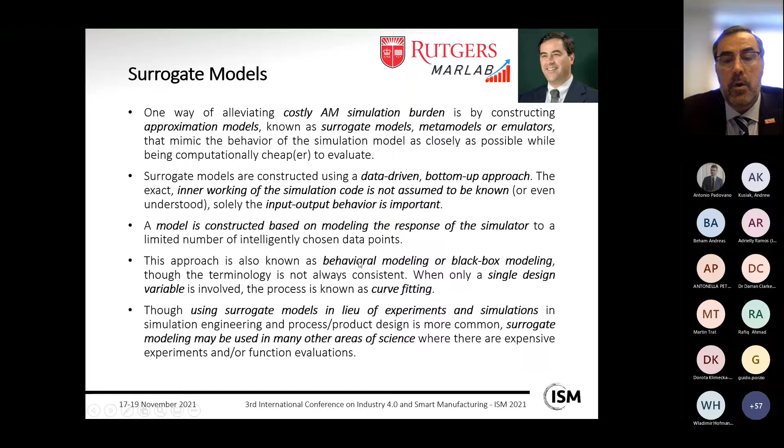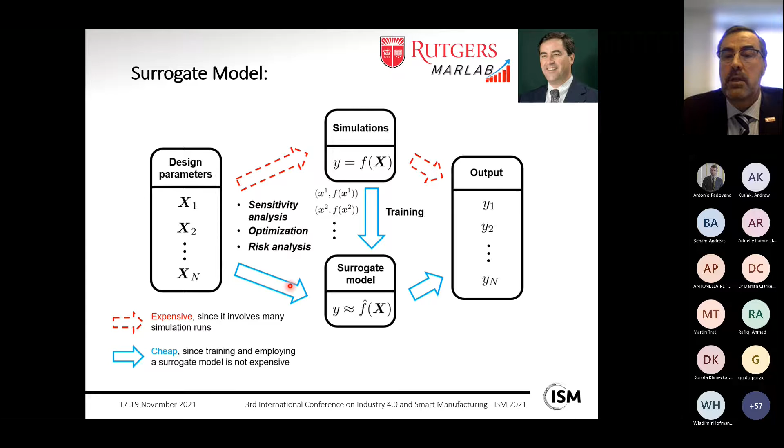Just to give an example, the expensive route would be the design parameters are used to obtain the simulations, and the outputs are offered. The surrogate model is a cheap way of providing a solution, but actually the surrogate model continues to learn from the simulations. In that case, not always does a simulation need to be conducted to obtain the outputs.

The envisioned anatomy of a digital twin includes certain things already developed and certain things still developing. For example, we know the thermal fields, we can have certain conditions that avoid defects, geometry and structure, and more confidently identify that. However, microstructure and mechanical properties, residual stresses, other compositional changes, grain size and texture effects, more refined predictions are not as developed.

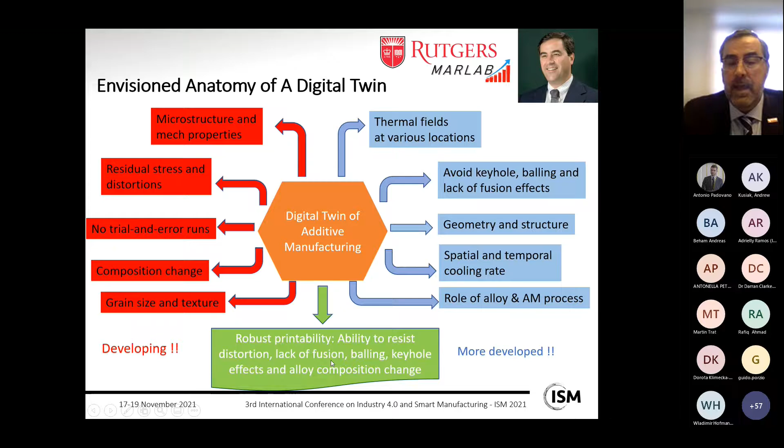The idea is to produce robust printability that has the ability to resist distortion, lack of fusion, balling, keyhole effects, and alloy composition change.

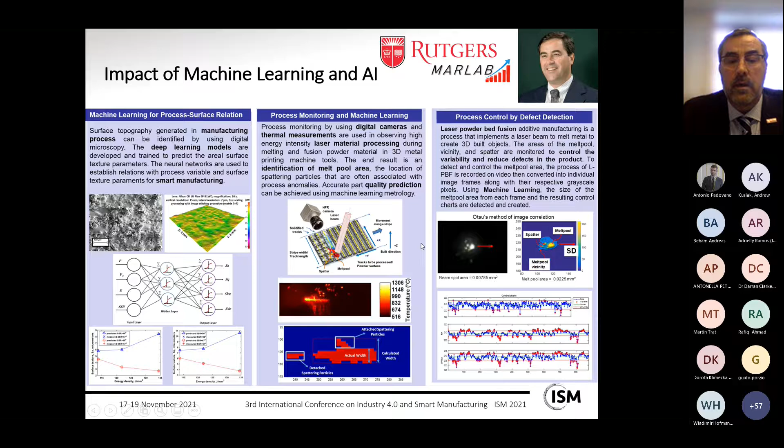The impact of machine learning and AI is already happening. We see machine learning used for various kinds of tools, as I explained, process-surface relations for example, and process monitoring, with machine learning providing digital shadows to be developed. Process control by defect detection is already part of these machine learning and AI applications.

For the future outlook, continuous improvement of the physics-based simulations and their integration with machine learning should be done, and these should be integrated into the digital twin.

Again, we have black box approaches and white box approaches where we have physics-based simulations, but they need to merge in a gray box approach, as pointed out by Aachen University, in order to create a digital twin that takes information from physical models and data-driven models as well, borne on a common strong digital twin that allows engineers to design products better and also manufacture those products better.

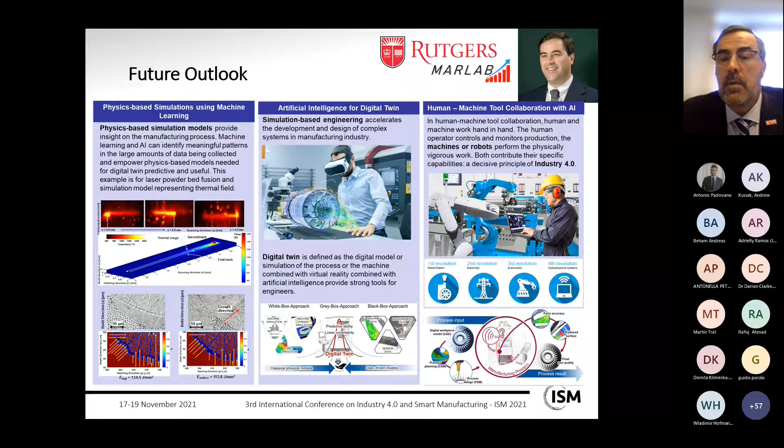Also, human-machine tool collaboration with AI needs to take place, so that operators can quickly see this digital information in order to do various kinds of tasks, including monitoring the manufacturing operation, providing the maintenance, and addressing quality and reliability issues.

In conclusion, simulation models are out there and they help accelerate development of digital twins in machining and additive manufacturing industries. Machine learning and artificial intelligence are used in machining and additive manufacturing processes to capture meaningful patterns in the presence of large amounts of data being collected from these manufacturing machines and systems.

Computational modeling and digital twins are becoming increasingly important. Simple physics-based simulation models for the process provide insight on the physics of the process, but it's not sufficient. They need to be

supplemented with physically informed machine learning, and the interactions between the physics-based models and the data analytics should be strengthened in order to develop predictive and useful digital twins in the era of Industry 4.0.

The sensors and hardware are at the core of this capability, because the sensors and new hardware will provide both data collection and sensor fusion, and in return, sufficient and meaningful actions in order to correct the situation, in order to adaptively improve the manufacturing enterprise.